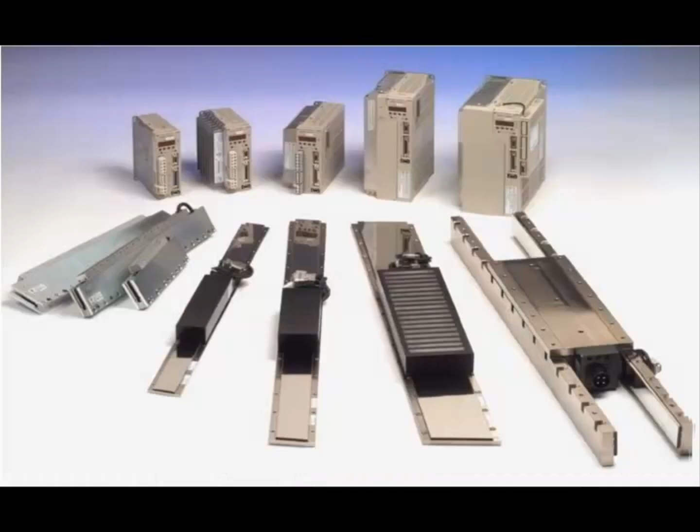Welcome to the Rotary Knife Solution Package with MPIEC Controllers webinar. The topic for today will be split up into these subdivisions. Basically, I would like to explain the different types of rotary knives that we've encountered in our experience with motion products, with and without registration, the two broad classifications. We will touch on the functionality of a rotary knife application solution that can take care of applications that require registration and those that do not require registration.

We will show you an automatic cam generation function block that will create regular cams that can help in your rotary knife application, and then the rotary knife function blocks themselves that will take care of your solution. And finally, we will show you how to implement the function blocks in your application to get your solution that you desire.

We'll start off with the first kind, the rotary knife applications that do not require registration. As you can see here, there's a knife, and in this pictorial example I have, there is just one blade. You could have configurations where you may have multiple blades as well, and this solution will take care of applications that require multiple blades as well. So in this example, there is one blade which is held at the 180-degree position on a 0 to 360 full rotation of one circle.

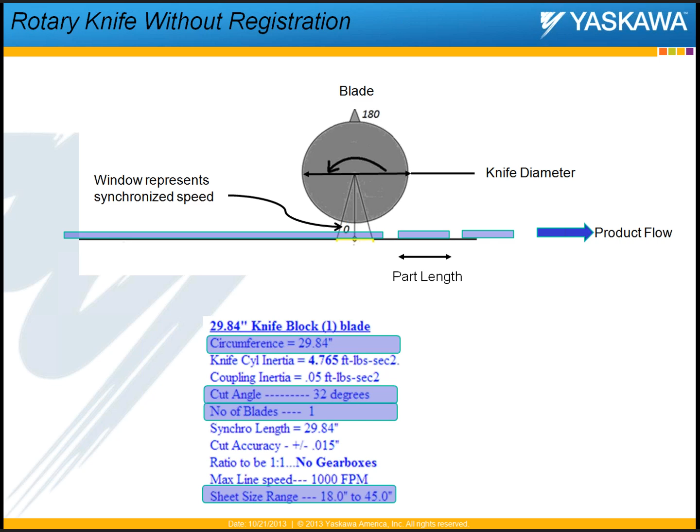The other type of rotary knife solution that we will be talking about is rotary knife application with registration, and that means you have a sensor and you have some product lengths or some registration marks on the product which determine where the part has to be cut or processed. The sensor could be placed close to the knife or relatively far away from the knife, depending on the machine. Here again, the important parameters are the circumference of the knife, the cut angle or the angle where speed synchronization should be achieved, the number of blades, and the nominal part length.

Now, the applications with registration typically have two subdivisions. There are applications that have part lengths that are known, but they may have small positive or negative variations. So let's say the nominal part length is 10 inches, you could have variations greater than 10 or less than 10, could be 9.9 or 10.1. There's also another type of registration-based rotary knife where you may have randomly coming parts that come in at unknown intervals. That also falls in this category of rotary knife with registration.

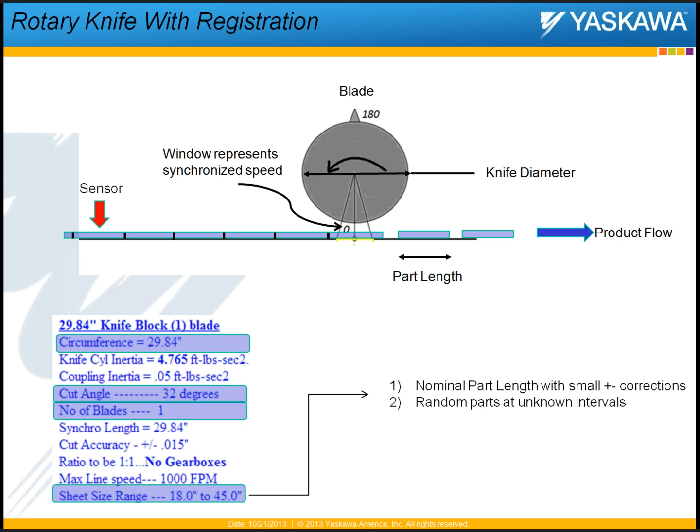So this template that we are presenting and offering today consists of 3 different function blocks, mainly. The first one is a rotary knife cam generator. The second one is a rotary knife without registration, and the third one is rotary knife with registration. So these are the 3 main function blocks.

Like I said before, the main parameters that need to go into your rotary knife application are the number of blades, the part length, the synchronization angle or cut angle, and the knife diameter. Once you pass these parameters into the rotary knife cam generator function block, that function block uses the cam generator function block inside it and creates 3 cam tables: a ramp in cam table, a running cam table, and a ramp out cam table.

And these cam tables are basically used to ensure that your rotary knife application can do the cutting or the processing in as smooth a profile as possible, which is why we have the ramp in and the ramp out that accompany the running cam tables. So this is for smooth ramp in, starting from 0 velocity to your speed matching velocity, and also for a smooth ramp out from your running cam table.

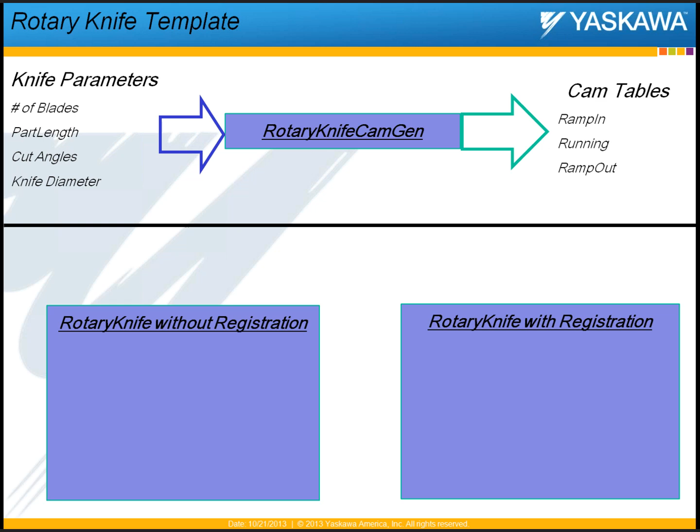Once these 3 cam tables are created, you could use any one of these 2 function blocks at the bottom. One thing to note is that the rotary knife cam generator function block needs to be used in a slow task, because this is a static process. It is just creating 3 cam tables, so you do not have to run it in a fast task. The data that is created by the cam generator is fed into the 2 function blocks shown below, rotary knife with or without registration, and those 2 function blocks need to be run at a fast task.

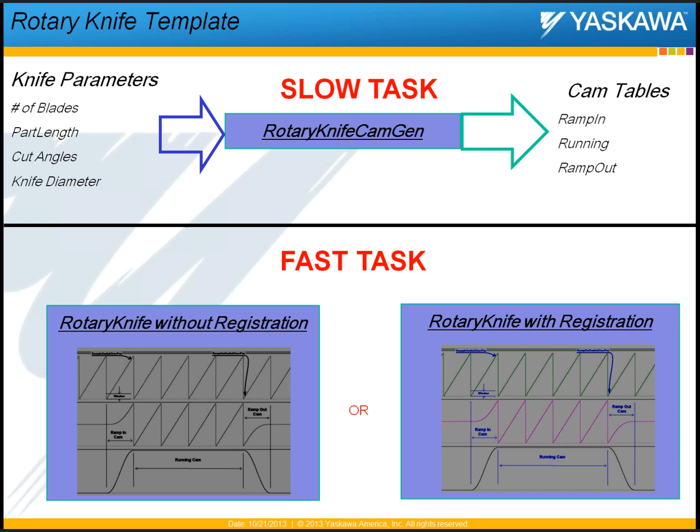And you can see once the ramp in, running, and ramp out cam blocks are fed into one or the other of these 2 function blocks, you basically get your required functionality. And we'll talk about this in detail. The first function block is the rotary knife cam generator function block. This block is essentially used to generate your ramp in, running, and ramp out cam tables.

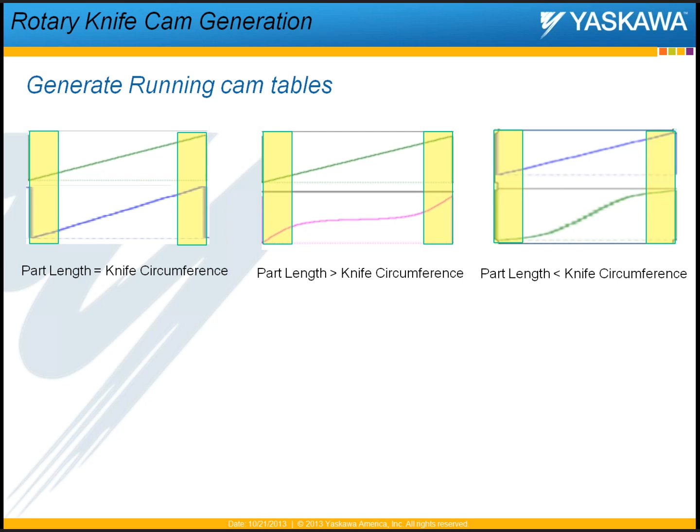Apart from just creating the running cam table, the rotary knife cam generator function block also creates ramp in and ramp out cam tables based on the parameters that are entered. And these cam tables have to be created such that they blend together easily and smoothly. You can see that the ramp in profile has to blend with the running profile, and it has to merge with the ramp out profile as well.

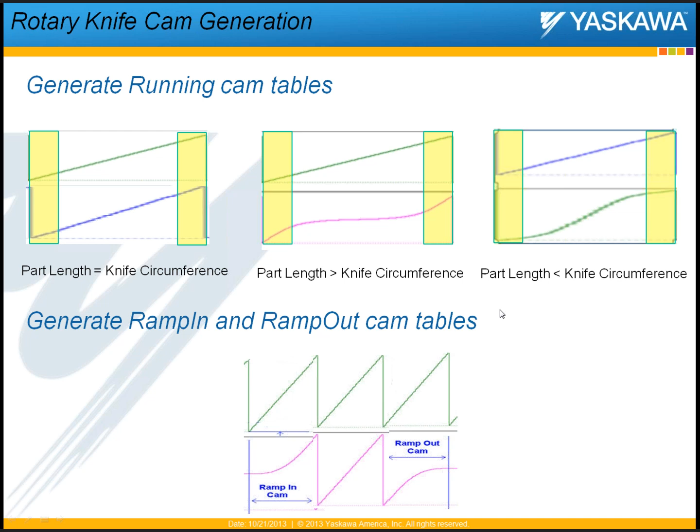Again, looking at the speed match areas in the three cam tables, you have your ramp in cam profile, the running cam profile, and the ramp out cam profile. There are two speed match or two cut zones that I'm showing in this particular example here.

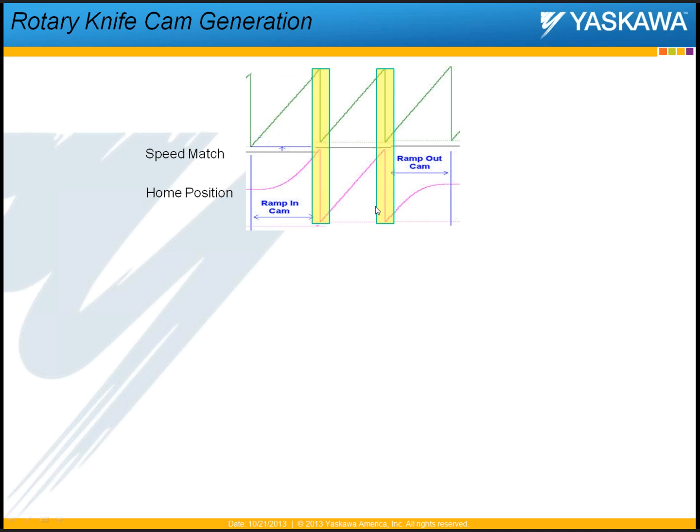An important aspect in setting up your rotary knife is the home position or the start position for your rotary knife. In the case of a one knife application, this solution expects the user to set the single knife at the 180 degree position as shown here, where the home position is 180 and the speed match or cut area is the 0 degree position in your cycle.

And this is to accommodate an easy ramp in. As you can see here, from the home position of 180, the knife can basically come down and cut at the 0 degree area, which is right here, and then continue running if need be. And if there is a request to ramp out, it can go from the 0 position to the 180 degree position as smoothly as possible, as the ramp out cam profile dictates.

If you have two knives, as shown below, the home position would be such that the two knives are away from each other, and they are basically set in the orientation shown here with the two knives here. And the home position would be 90 degrees, and the cut position would be 0 again.

If you have three knives, this would be the home position, with the bottom one showing the cut position and the top picture showing the home position. And with four knives, the orientation is going to be as shown here, where the home position is at 45 degrees and the cut position is at 0 degrees.

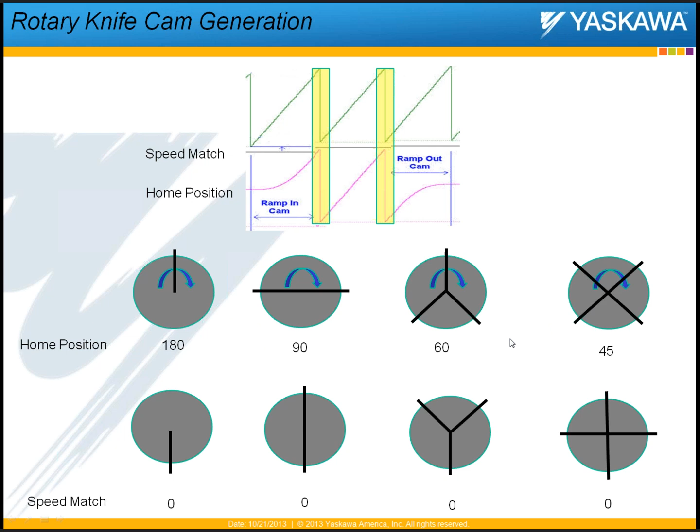Now, this is very critical. It's very important that the user understands these home positions before a rotary knife application is implemented. Here is the new function block that we're introducing. It's called Rotary Knife CamGen, and let's explain the various parameters that need to go into this function block to get what we want.

The top two variables, knife parameters and blend data, are elements that are generated by this function block for use in other parts of this template. So the user does not really have to fill in any of this data. The user will have to define these variables. The first one, knife parameters, is a new data type called rotary knife structure, and the blend data is something that those of you who've used the CAM toolbox, CAM blend function block have seen before.

Blend data is a variable that is created as a blend struct data type. So the user has to define these variables, but does not have to define or initialize any of the elements of these two data types, because these are created in this function block. The user will have to provide the part length that is going to be used, the diameter of the knife, the number of knives, the start angle for speed matching, and the end angle for speed matching. This reversible cam input will be discussed later.

So as you can see here in this one knife example, your home position is 180 degrees with the knife facing away from where the product is going to be cut or placed. 350 degrees is the start of the speed match area. 0 degrees is where the speed is exactly matched, and 10 degrees is where the speed match ends. After that, the knife basically goes back to its 180 degree position.

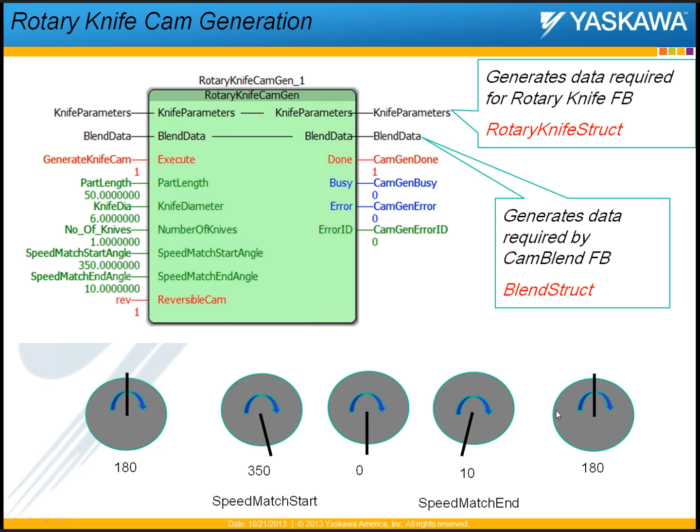So once the cams have been generated, this is the rotary knife function block without registration. And as you can see here, some of the parameters are variables that were created by the rotary knife CamGen function block. This is the blend data that was created, which has the cam table IDs of the ramp in, running, and ramp out cams. Knife parameters has some of the parameters that will be used inside this function block, and this one is created by the rotary knife CamGen function block as well.

The user in this case will have to decide on the logic when to execute your rotary knife, or when to execute your ramp in and when to execute the ramp out for this particular application. And you can see here is one example where the user executes a ramp in, and in the very next master cycle, the ramp in is done where the axis goes, in the case of a one knife system, from 180 to 360 or 0 degrees, makes a cut, and then runs along and makes another cut here.

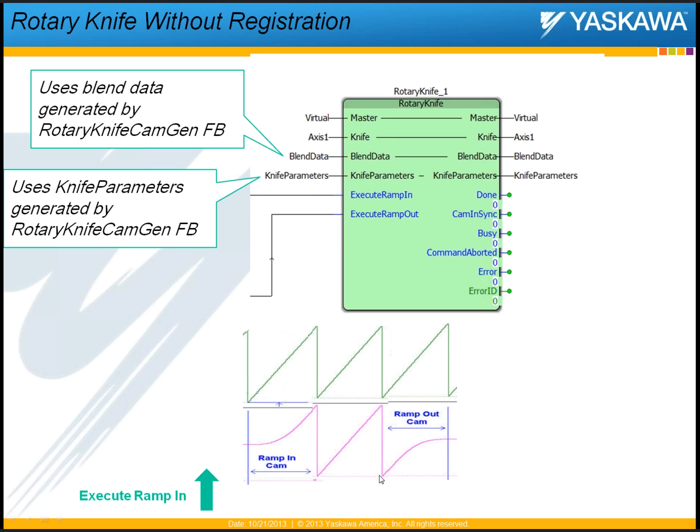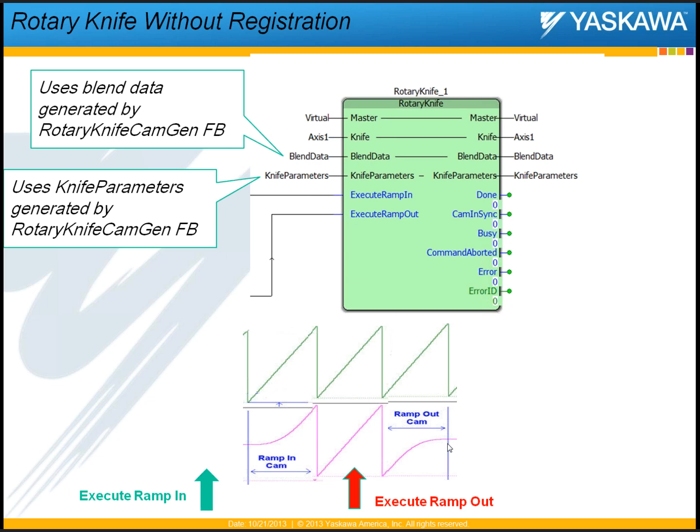So the advantage of this solution package is that given the parameters of your rotary knife, we generate 3 different cam profiles that are blended together: the ramp in, running, and ramp out. And the user really does not have to do anything to create or worry about these 3 cams or synchronizing these 3 cams and firing one cam to the other.

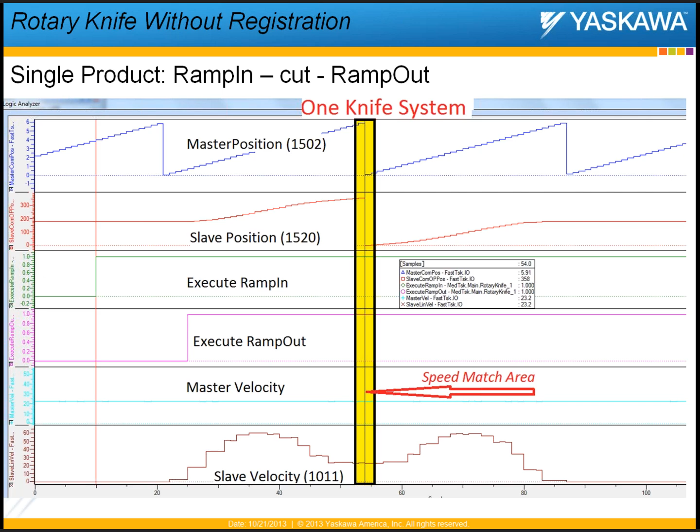All these are done automatically within this rotary knife function block, and you can see the output here. Here is an example where multiple parts were being processed continuously, and there were 4 knives in the system. You can see the 4 knives.

Each master cycle corresponds to one knife making its cut, and you can see here each knife is basically speed matching. And there are 4 knives in the 0 to 360 degree complete physical cycle of the rotary knife. The execute ramp in happens in this master cycle. The very next cycle, you can see that the slave has started moving.

And in this example, you can see that the slave axis is accelerating to match the master's velocity, and then it decelerates because the part length is much longer than the circumference of the knife.

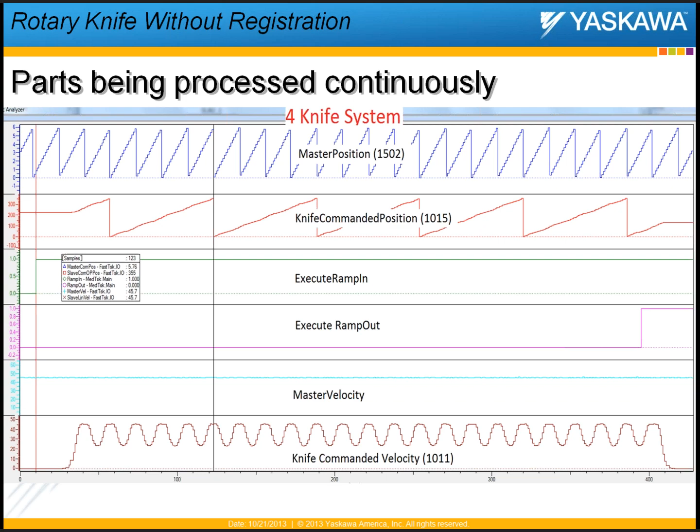Again, this is an expanded view of the previous slide. You can see that your ramp in profile or your velocity at ramp in is smooth, and it ramps in and matches the velocity. And after that, it basically continues its running cam profile until the ramp out command is given.

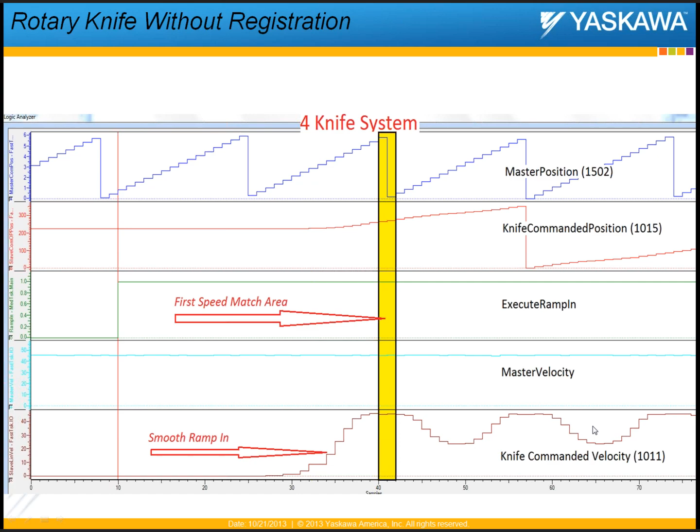Now, a lot of you who've used the cam functionality with the MPiec controllers have used cam generator, have used the cam tool probably. For those of you who've used the standard MP product for a long time, the cam tool provides an easy way in which you can view the cams that you generate.

And tangent matching is a popular curve type that has been used by people who use cams a lot, basically because it provides a way of smoothly matching a straight line to a straight line, or speed matching areas can be matched using a smooth profile. However, there is one drawback for the tangent matching profile. I shouldn't call it a drawback.

It's basically a characteristic of the tangent matching profile equation, that if your straight lines that you want to match tangents along have a wide difference between them, or if their slopes do not intersect or are far apart, then you end up with a situation where the profile generated using the tangent matching can reverse in position. This would mean that the cam would reverse in velocity, or it would go one way and then the other, and then would have to reverse again to match the position.

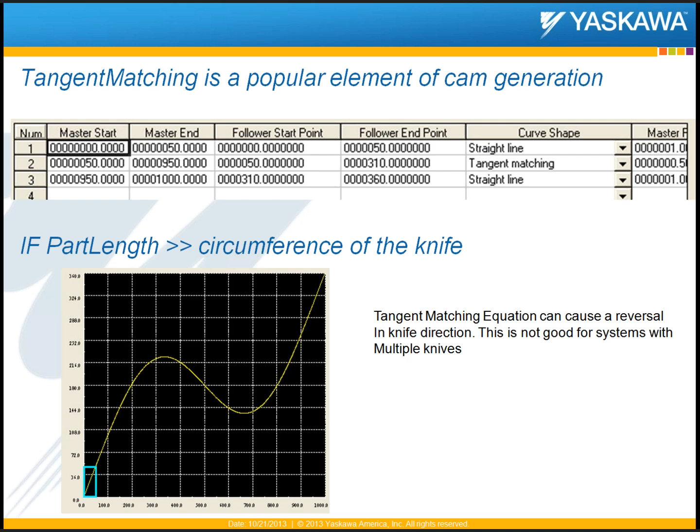And here's an example where we experimented with the tangent match profile, and when the part length was way longer than the knife circumference, you can see that the position reversed, and that can be seen from the velocity plot as well. The velocity is positive all along, and then it goes negative. There is no discontinuity in the profile. However, the velocity goes into the negative area, which means a reversal in position for the knife before it continues on forward, because that's the shape of the cam that is generated.

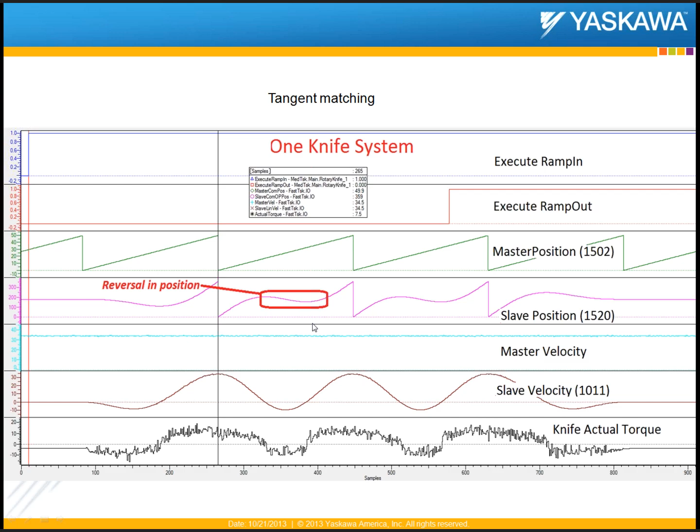To prevent that from happening, we experimented with a Bezier curve to prevent the position from reversing, or speed from going negative. And you can see here one extreme case in which the tangent matching was used, and the tangent matching basically reverses in position, but with the same parameters on a Bezier curve, the red line shows how the velocity gets constrained, and the position does not reverse in this case.

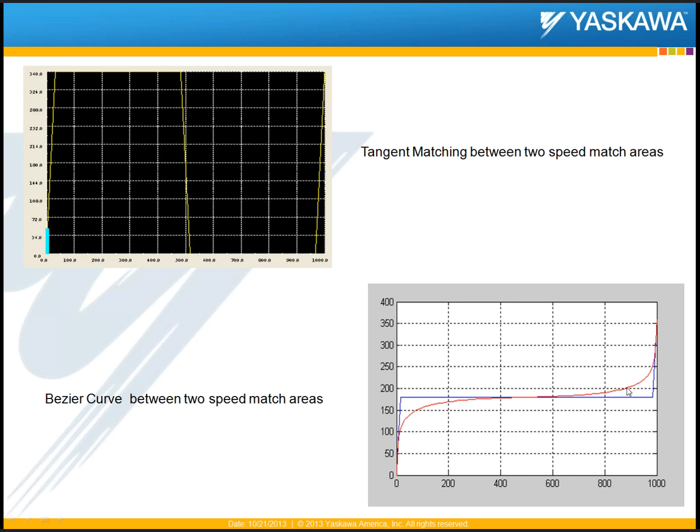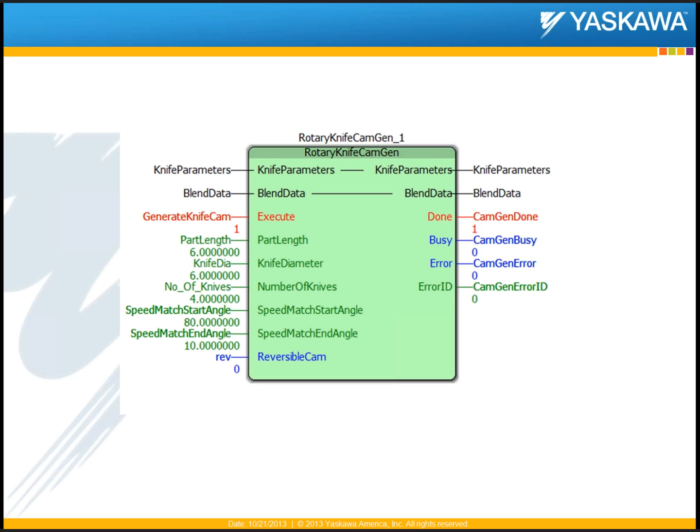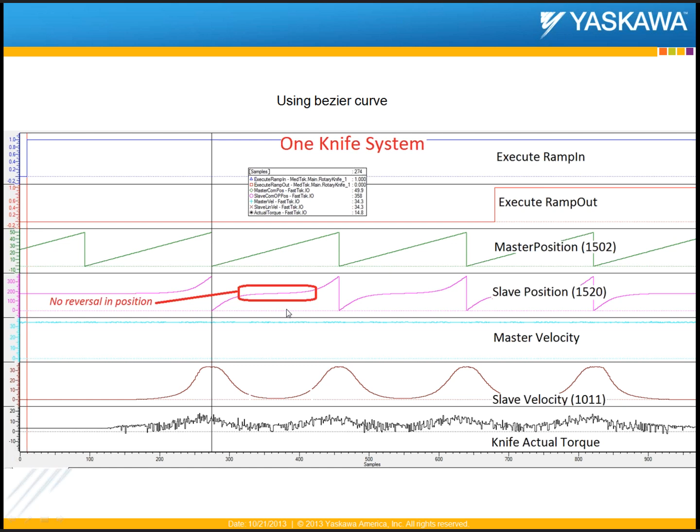Here's a comparison of using the tangent matching and Bezier curve for the same part length. And remember, this happens only when the part length is much greater than the knife diameter. This may not be a practical problem in a lot of applications, but there are applications we've seen where this can happen. And you can see here, if the part length is large, the knife position can reverse if tangent matching is used. It does not reverse when Bezier curve is used. And the speed going negative is prevented by using the Bezier curve. So that is an option that users can choose, and users should be aware of.

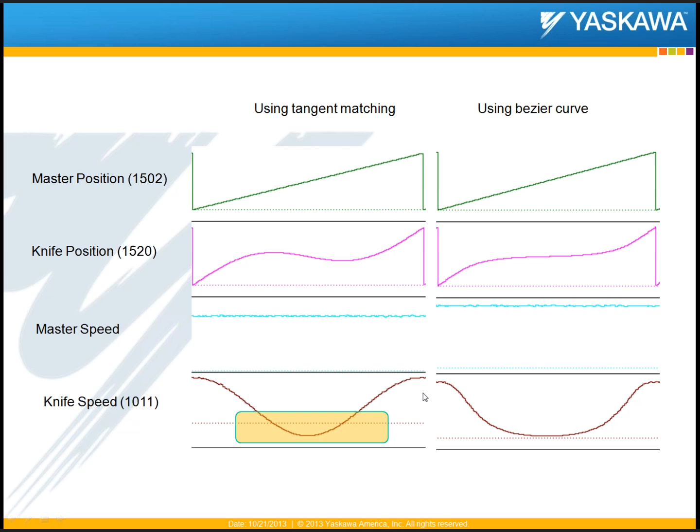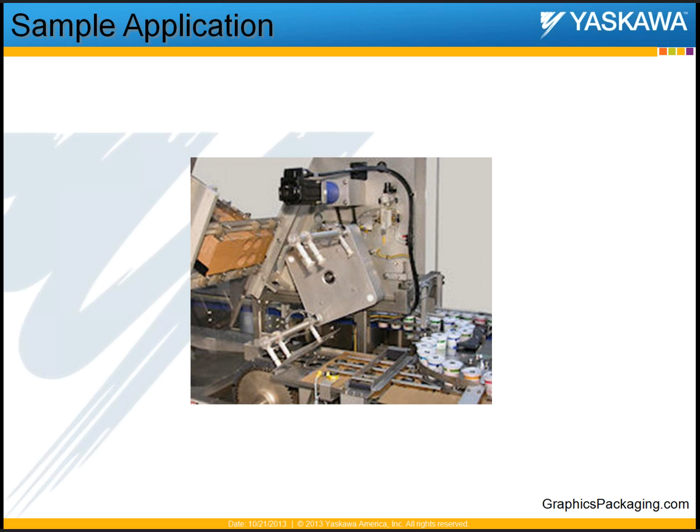Here's a sample application. Like I said before, the rotary knife does not mean that you can use it only for applications that involve knives or cutting. It can be used for applications that require placing or picking. Knives definitely for certain, but any kind of stamping application or, like I said, placing application, you could use this function block and get a solution out of it. Next, we are going to talk about rotary knife with registration.

Let me take a quick break here just to see if there are any questions that I can answer. Does the Bezier function slow down the throughput? No, the Bezier function does not slow down the throughput. The Bezier function is just a different equation in generating your cam profile. So it does not by any means slow down the master or slow down the slave or do any kind of motion. It does not affect motion really, except that it prevents your running cam or your ramp in or your ramp out cams from going backwards or reversing in direction. It does not slow down the rate at which your production goes on.

Does the Bezier curve limit homing to one direction only? The Bezier curve does not have anything to do with homing per se. You can decide your own homing procedure. These solution function blocks do not provide a solution for homing. The user will have to decide on the homing procedure by themselves. They basically will have to put a sensor or look at the absolute position of the knife and decide the shortest distance to go to a home position. The curve is essentially used for camming purposes only, once you have parts and you're trying to process parts. So it does not really constrain your motion before the camming has been done and before production has begun.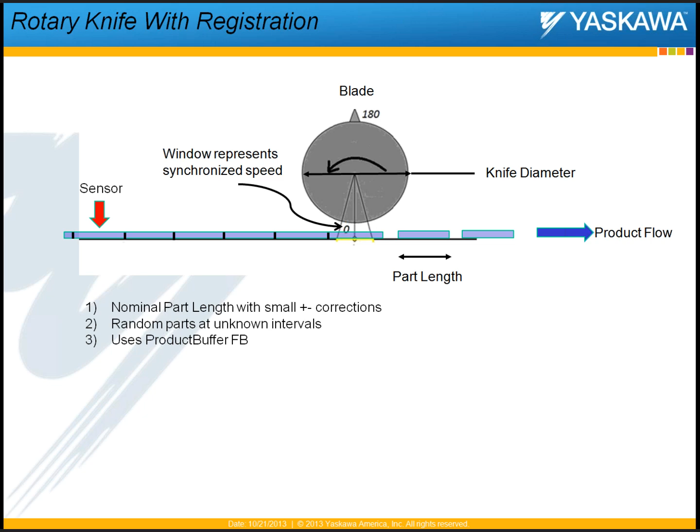Now, this part of the solution uses the product buffer function block from the PLCopen toolbox that a lot of you might have used and are familiar with. The product buffer essentially is a rotary buffer that keeps track of the position of the master as the sensor detects it.

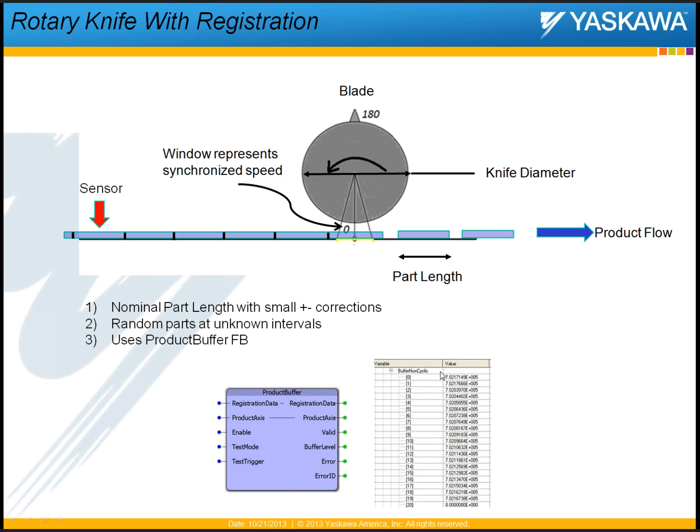So one of the first elements a user has to define when you deal with the rotary knife with registration is the registration data, or basically they'll have to give the controller or the project some information about their product buffer.

Important terms to input to the function block are the size of the buffer and the lockout distance, which is essentially the smallest distance between two parts. You don't want the product buffer to capture any noisy signals, so you set this lockout distance to tell the controller that any sensor input detected within the lockout distance can be ignored. So the product buffer will not look at such signals. That is this lockout distance variable.

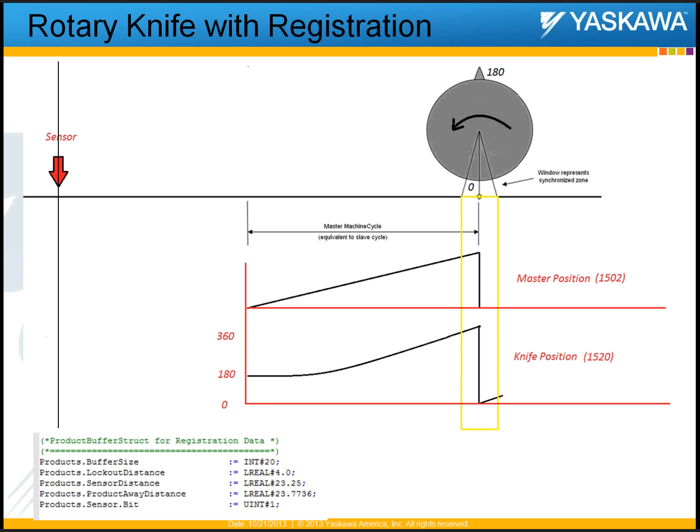Sensor distance is the distance from the sensor to where the cut or processing takes place. The product away distance is the distance from the sensor to where the product can be considered to be processed and out of the way. That is kind of critical. Users should not ignore this distance or set it to default. This is important, and we'll see why later. It essentially is used to update the use pointer variable inside the product buffer.

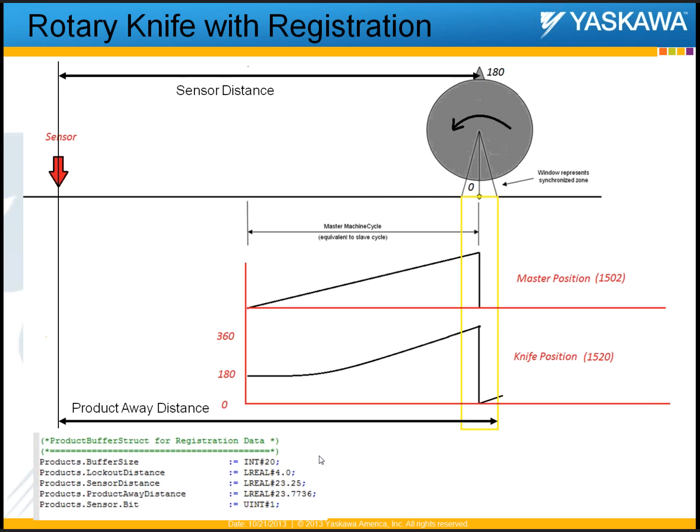So that is important. And last but not least, you have to define which physical input the sensor is wired into. All these variables that we have declared are of data type product buffer struct. It's part of the registration data input on the product buffer function block.

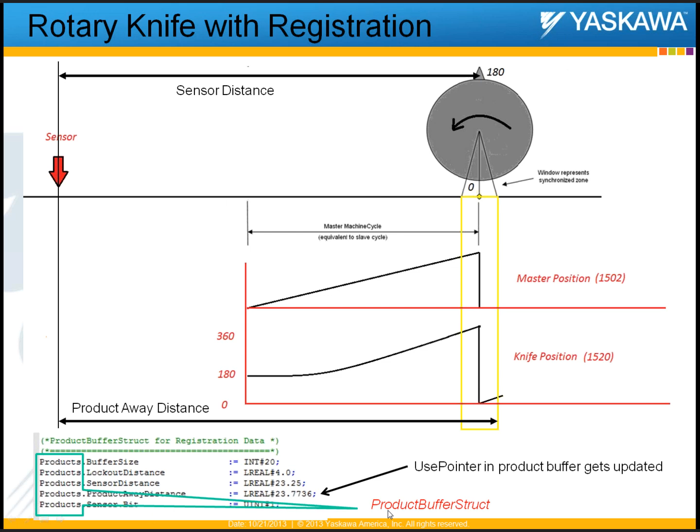The other piece of information that the user will have to provide is something called control data that will be used in this kind of application. Here again, mode is 1 for a rotary knife. The decision position is the position where a decision to cam out has to be made. If there are no more parts in the buffer, this is the position on the master which tells the controller when to cam out, or ramp out and go back to home position.

The end sync position and start sync position are the positions where the synchronization should start and end. So this is the start sync position right here, and this is the end sync position, and those are on the master cycle. The safe engage distance is a distance where the cam can be engaged safely with a ramp in profile, and typically the suggested safe engage distance is 1 to 2 part lengths less than the sensor distance.

So you can see here that if you engage the cam somewhere in this area between the sensor and 1 product length, then you have the capability for the ramp in to take place successfully. If you try to engage the whole process here, you won't have enough time for the ramp in to take place. So you want to set your safe engage distance 1 or 2 part lengths less than your sensor distance. So sensor distance minus 1.25 part length would set me right here.

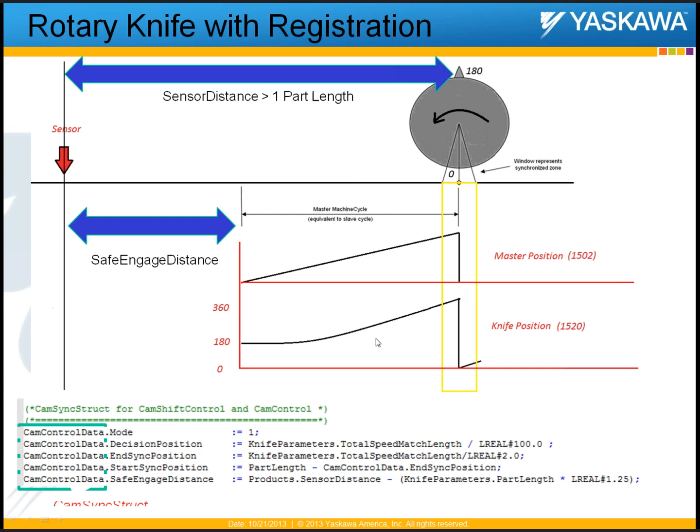And like I mentioned before, a user has to be careful with some of these parameters when using registration, just to ensure that the cam out decision is made properly, and they have to knowingly set these parameters based on the application. So the first thing to understand is if you're not ramping out, let's say your product buffer is full and there's parts coming in continuously, you basically continue your running cam and it continues like this.

Let's say at a certain point your product buffer is empty and there are no more parts coming through. You will have to make a decision just before the last part. You basically will have to do a ramp out, for the slave to go back to its home position. In a one knife system, let's say you want to bring the knife back to a 180-degree position where the knife is sitting at the top dead center.

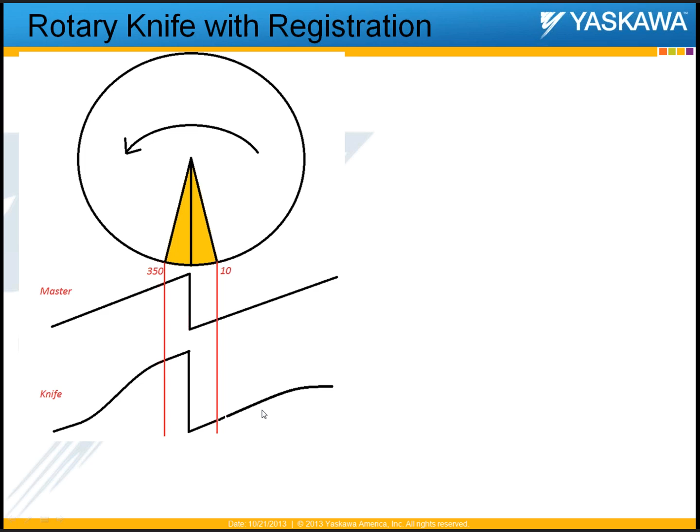If you want it to ramp out, you have to understand that the ramp out process is done automatically by the rotary knife function block, but it takes place only when the master is past the decision position and the use pointer is equal to the store pointer. So we have to make sure that the decision position is defined correctly. I mentioned earlier that the decision position has to be defined correctly.

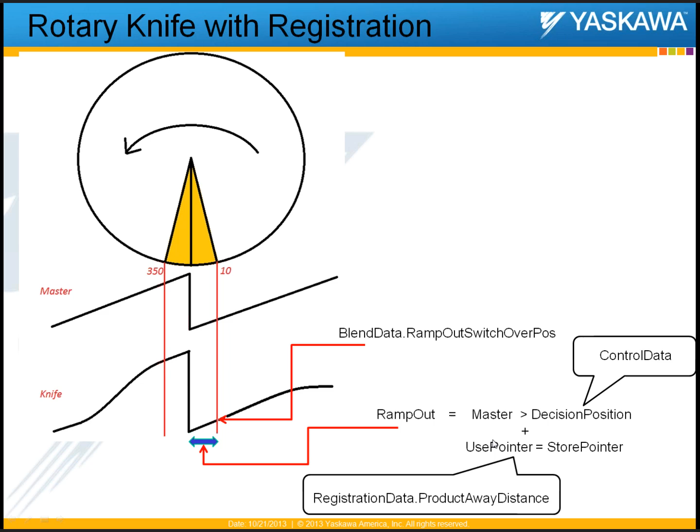And that is something that the user has to define properly. So in this case, if I choose my decision position to be somewhere here in the master cycle, and let's say my product away distance is also somewhere over here in the whole process, then if these conditions are satisfied, I get my ramp out command from inside the function block, and I will be able to ramp out.

But also another thing to keep in mind is the blend data. The switchover position for going from the running cam to the ramp out cam will also have to be set such that the ramp out cam starts here, so that I can ramp out and go into the end cam. If the ramp out cam were starting at this location, then my ramp out would have waited for one more cycle to get executed, because once it passes that window, it gets executed only in the next cycle.

So in this scenario, I had to make sure that my ramp out blend position was after the ramp out command was generated inside the function block. And to control that, I had to make sure my decision position and my product away distance fell within this window so I could ramp out immediately. So this was the last part that it processed, and after that last part, my knife ramped out and went to the home position.

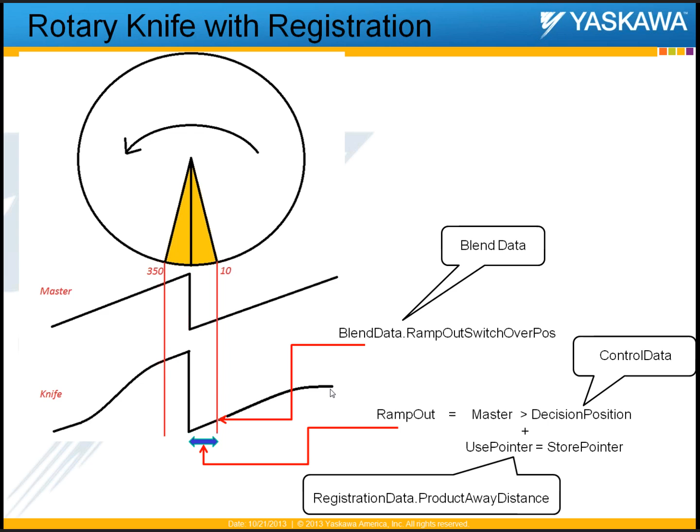So in summary, here is a view of the rotary knife with registration function block. The various inputs into this function block are the product buffer struct that takes care of all the product buffer information, the products that are captured by the sensor. The cam control data is of type cam sync struct, which contains all the information about when to cam out, when the window comes in, and so on. The blend data and the knife parameter variables are from the rotary knife cam generator.

And then there's enable and there's a stop buffering if you want to temporarily pause the knife by flushing out parts in the buffer. You can also do that here. The outputs are the regular PLCopen outputs, along with a current buffer level and the number of items processed for this function block.

One thing to note, a difference between the regular rotary knife without registration and the rotary knife with registration is that the one with registration decides when to ramp in and when to ramp out based on the number of products in the buffer and the distance that the master has traveled. With the other rotary knife, the one that does not use registration inputs, the user has to determine when to engage and disengage the knife, because it's not based on any sensory input.

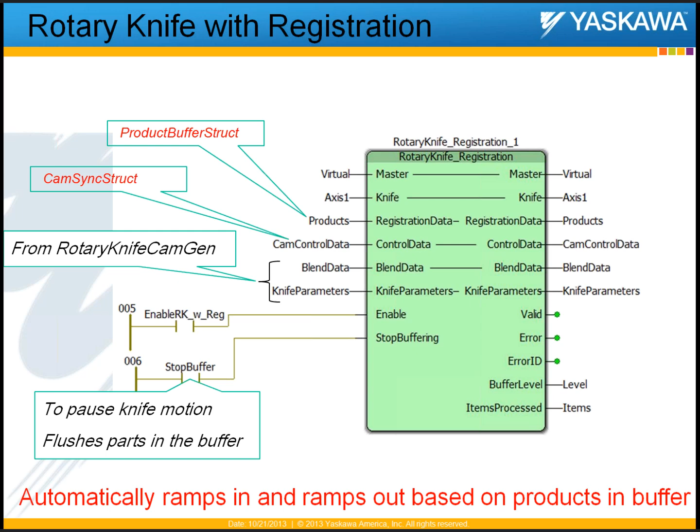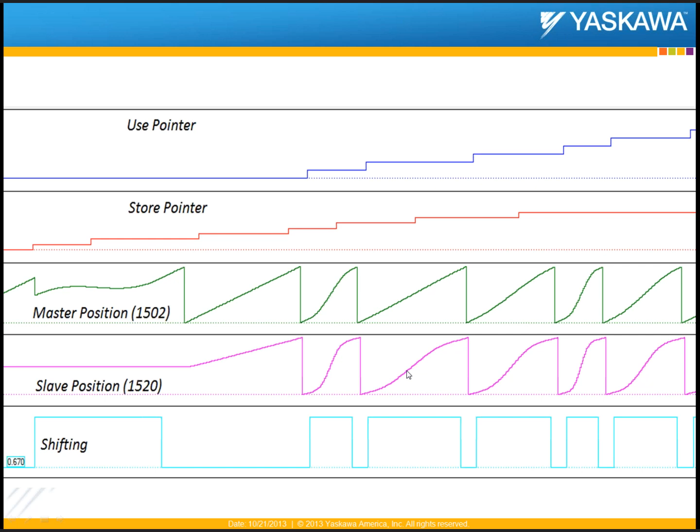In summary, implementing the rotary knife template is fairly simple. You have to place the rotary knife cam generator function block in a slow task. This is because it is generating 3 cam tables, and you want to give it enough time to generate its cam tables. Once you're done with a part length, you can go in and change it and refire the execute. It'll come out with 3 different cam profiles for your new part length.

Once you're done with that, you have to home the rotary knife based on the number of knives, as we discussed earlier. Home positions for the various knife configurations that we tested out are shown here. You could probably use it for a larger number of knives if they're symmetric, but in our experience, we've not seen applications with more than 4 knives. So these are the home positions for configurations that have up to 4 knives.

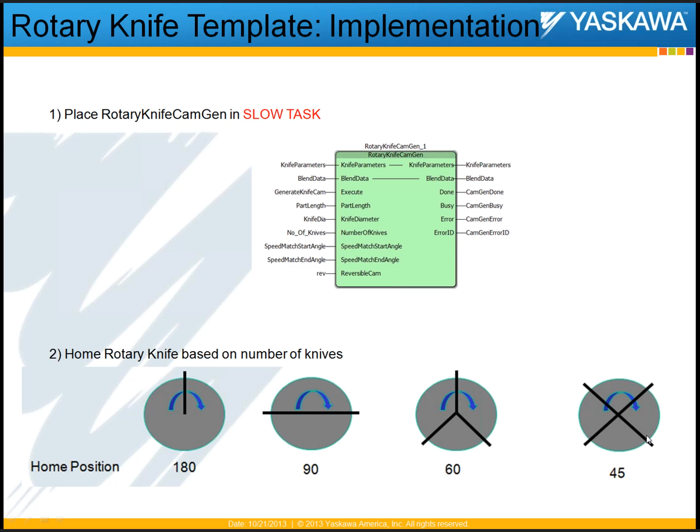Once they're homed, you can run either the rotary knife or the rotary knife with registration function blocks. Either or, you don't have to use both at the same time.

If you're using the rotary knife without registration, the user has to determine the logic for ramping in and ramping out. If you have sensors and have registration, the user will have to specify registration data information, control data information, and some elements of blend data if you want it to be different from the default.

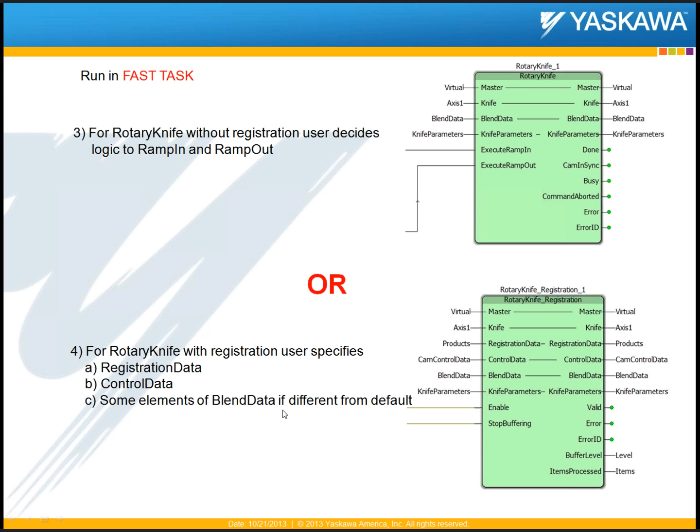So in summary, the whole template basically consists of 3 different function blocks, the rotary knife CAM generator and two rotary knife function blocks, one with registration and one without registration. All these function blocks essentially use functions that are part of the CAM toolbox and the PLCopen toolbox. It uses, for example, CAM generator, CAM table manager, CAM control, CAM blend, CAM shift control from the CAM toolbox, and a product buffer for part registration from the PLCopen toolbox.

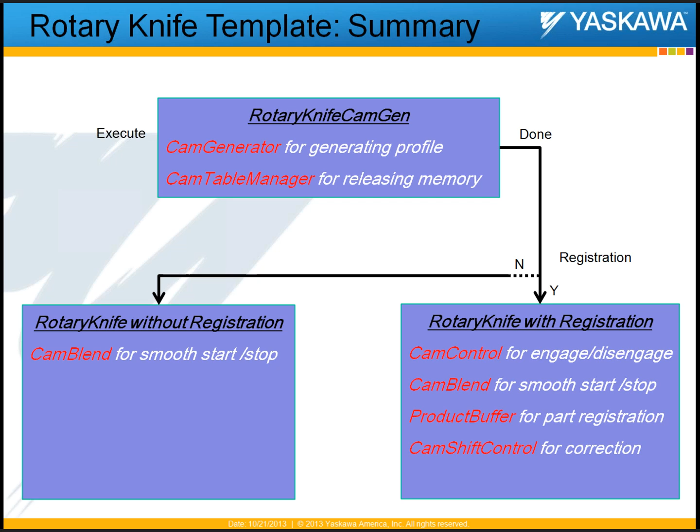And that is all I have as part of the presentation. I will try to take a look at your questions and try to answer them one by one.

There is a question: if you're using the Express version of programming software, can we have both function blocks in the same task, will it hurt us? Yes. This is basically the reason why we split it up into at least 2 different tasks, because we want the CAM generation to happen in a slow task, and the control of the rotary knife to happen in a fast task, so that if it needs to make quick shifts or quick corrections, you want your processor to run at a fast rate.

Now, it is not required that you should use the rotary knife CAM generator function block that we talked about, because that's the one that takes more time. So let's say the user has predefined CAM tables that can be created and stored in the controller, then they do not have to use that CAM generator function block in a slow task. If there is any other way of generating the data in a medium or fast task, then they can use that data. You're not tied to using the rotary knife CAM generator function block.